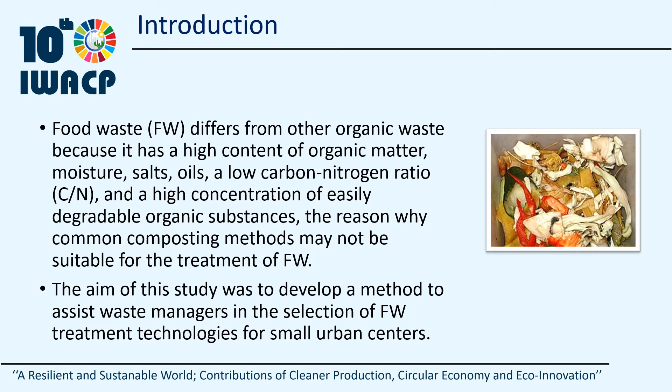Food waste is different from other organic waste, as it has a high content of organic matter, moisture, salts, and oils. Also, it has a low carbon-nitrogen ratio and a high concentration of easily degradable organic substance. For that reason, common composting methods may not be suitable for the treatment of food waste. The aim of this study was to develop a method to assist waste managers in the selection of food waste treatment technologies for small urban centers.

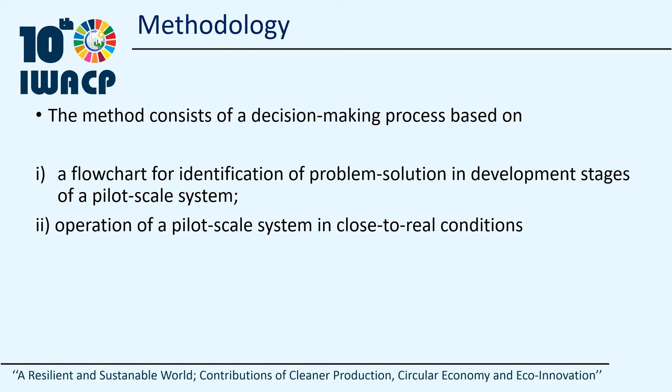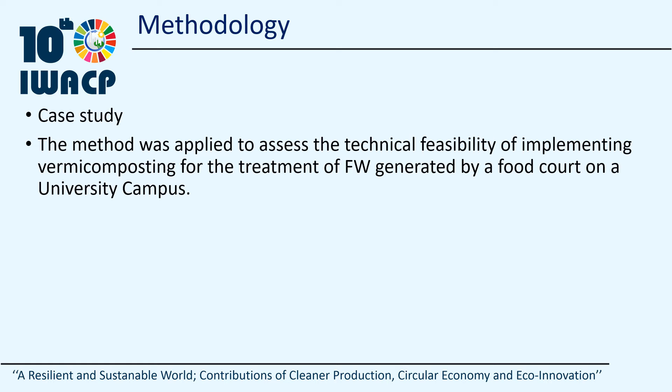The methodology applied to this study consists in developing a flowchart for selecting a composting technique and then testing the selected technique in a pilot scale unit. The method was applied to assess the technical feasibility of implementing vermicomposting for the treatment of food waste generated by a food court at a university campus. The study was developed using solid waste produced in the food court called Service Area 1 of Campus 1 of PUC Campinas.

Service Area 1 comprises 3 restaurants, 4 snack bars, 2 kiosks serving juices and popcorn, 6 service stores, in addition to space for students and employees to store their homemade food. Classes take place in the morning, afternoon, and evening, being the latter with the largest contingent of users. Service Area 1 represents well food courts in large educational institutions.

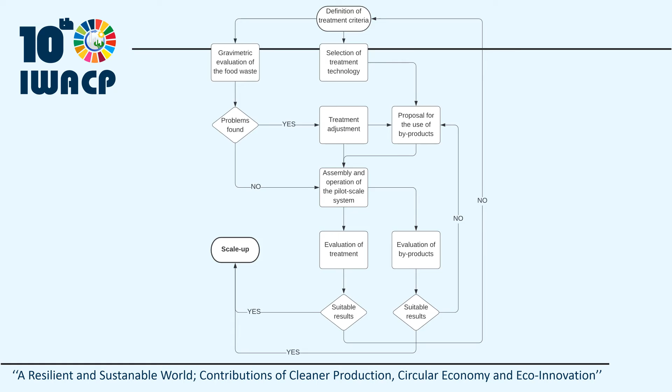Now, I'm going to present the flowchart proposed in this work. The flowchart stages comprise definition of treatment criteria, selection of treatment technology, gravimetric evaluation of food waste, proposal for the use of byproducts, assembly and operation of the pilot scale unit, evaluation of treatment, and evaluation of byproducts. The first step was the definition of treatment criteria. The main criteria were composting time and simple assays for treatment evaluation.

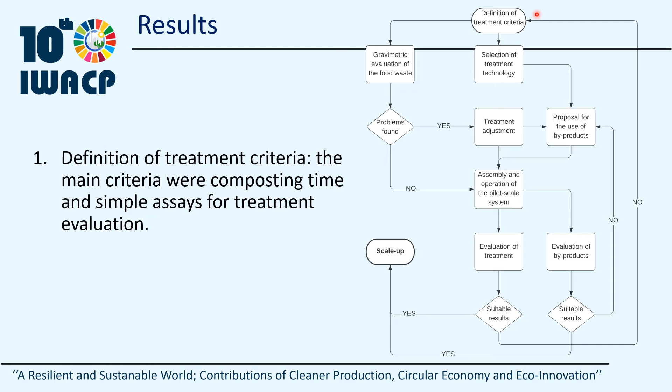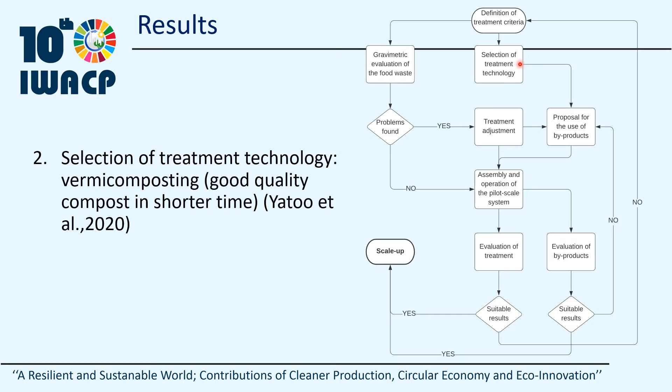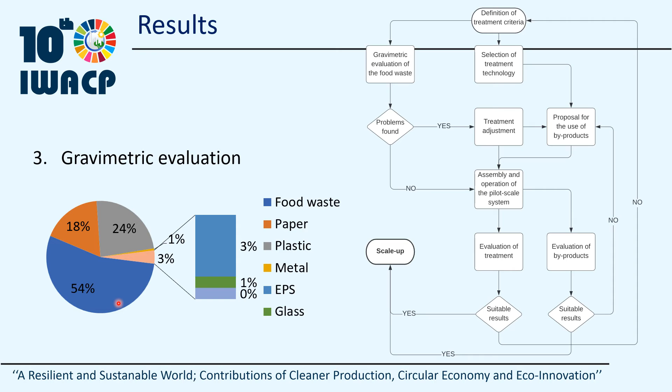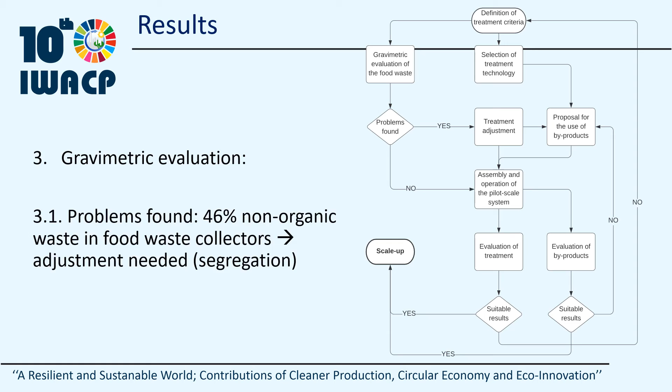The second step was the selection of treatment technology. We selected vermicomposting because it produces a good quality compost in a shorter time than other composting methods. We conducted a gravimetric evaluation of the waste from food waste collectors, and the results of this step are shown in this graph. As you can see, only 54% of the waste in food waste collectors was food waste. Following the gravimetric evaluation, we found a problem. 46% of the waste was non-food waste, but packing materials, such as paper, 18%, and plastic, 24%. In step 4, we propose the use of the compost to control erosion in degraded areas.

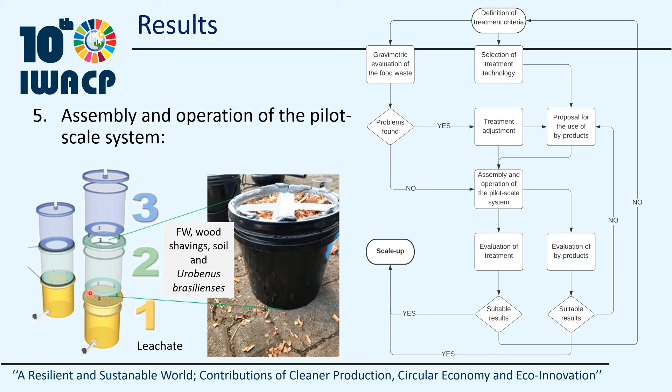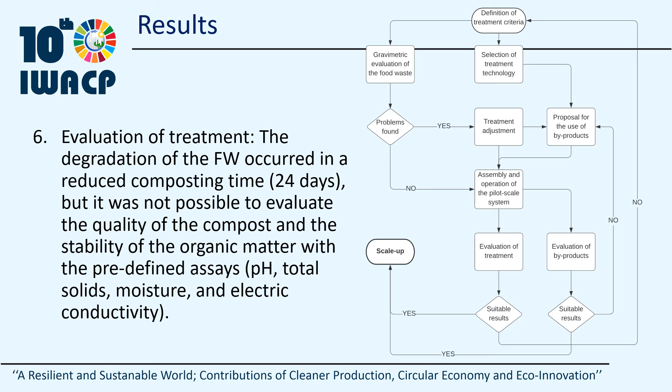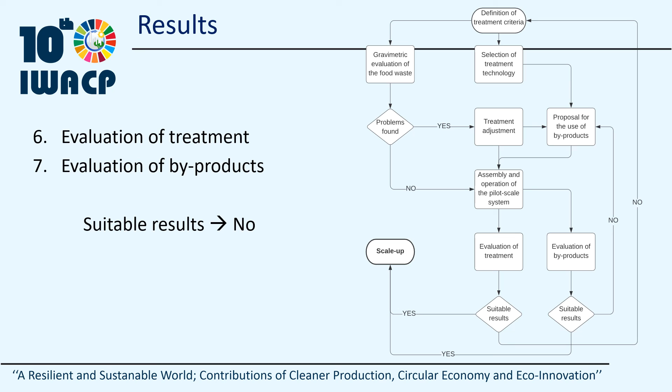We observed that degradation of food waste occurred in a reduced composting time, only 24 days, but it was not possible to evaluate the quality of the compost and the stability of the organic matter with the predefined assays, which were pH, total solids, moisture, and electric conductivity. The compost did not present aggregation behavior in geotechnical Atterberg tests. After the evaluation of the treatment and the compost, we concluded that new criteria are needed for treatment selection. The possible implementation of a full-scale treatment without the application of the described method would not be successful, causing economic losses to the institution and non-acceptance of the proposed treatment.